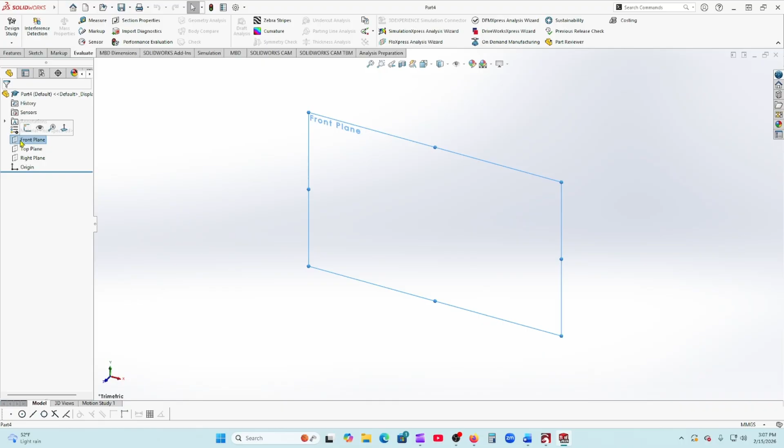I'm going to start by opening a sketch. I'm going to make sure that I am in millimeters, grams, and seconds. And I'm going to take a look at this blueprint real quick just to see what we're doing here. I'm going to start my sketch in the front plane, so I'm going to open it up like this.

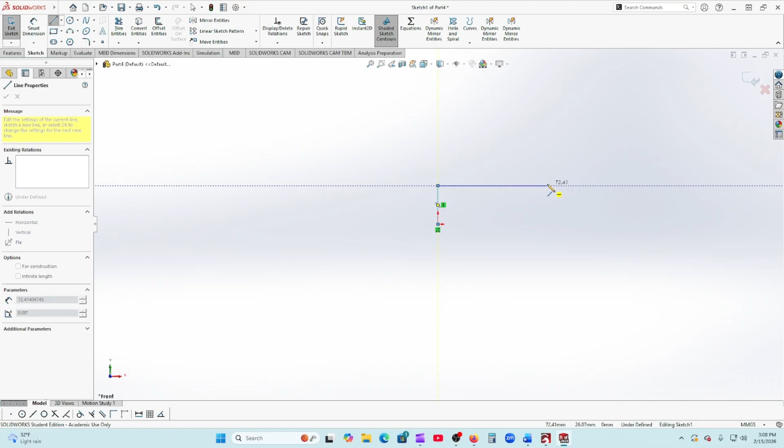Then I'm going to start with my line tool, and from here I'm going to click on the origin. I'm going to go up about 24 millimeters and then over 72-ish. Then I need to look at this. Let's see, so we need about 11 from here. Come over about 23, come down about 13.

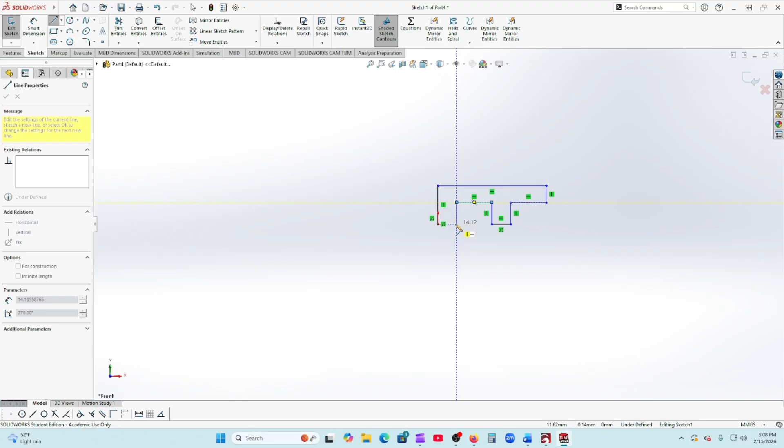About 12-ish. And I locked in a relation there that I'm going to have to get rid of because it's going to give me a hard time if I don't. Right here, exit out of my line tool, is this coincident line that I drew in here. You know what, we'll leave that alone because that looks like it's going to be pretty good for us. But I did draw in here, and I think this line has it. No? All right, well we'll see what we get here when we go to do this.

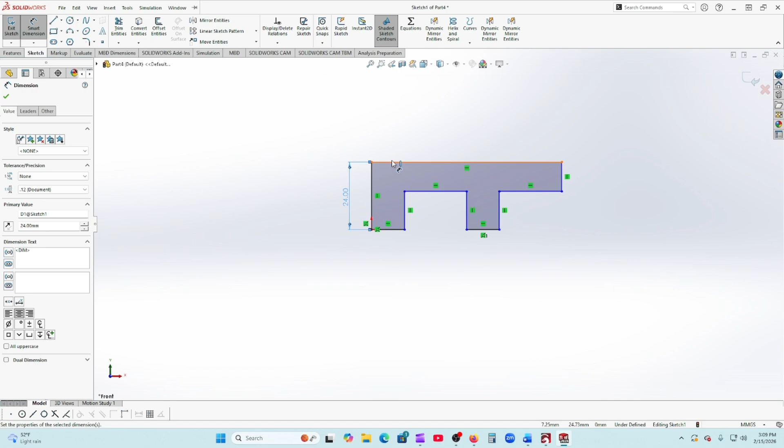So I need to dimension everything, and I'm going to dimension that to 24 millimeters. I'm going to dimension the overall length to 72. I'm going to dimension this to 12 millimeters. And then from here to here, I will dimension that to 37. We'll dimension this one to that one. We're going to dimension this one to 23.

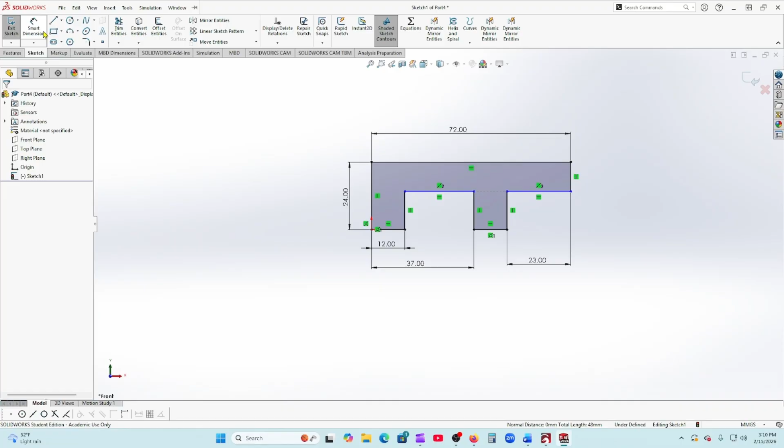The only thing keeping us from getting a fully defined sketch is this right here, so I'm going to make those collinear. Oh, I see what we're missing, I'm still missing a dimension here. So we're going to lock that in at 13 millimeters, and now we have a fully defined sketch, as you'll see down here.

So we can go ahead and extrude this. I've talked a few times about extruding and kind of looking at the blueprint to see which way is the best way to extrude this. I'm going to extrude this towards me only because there's a rib that goes on here, and when I go to draw that rib in there, it's going to make it a little bit easier.

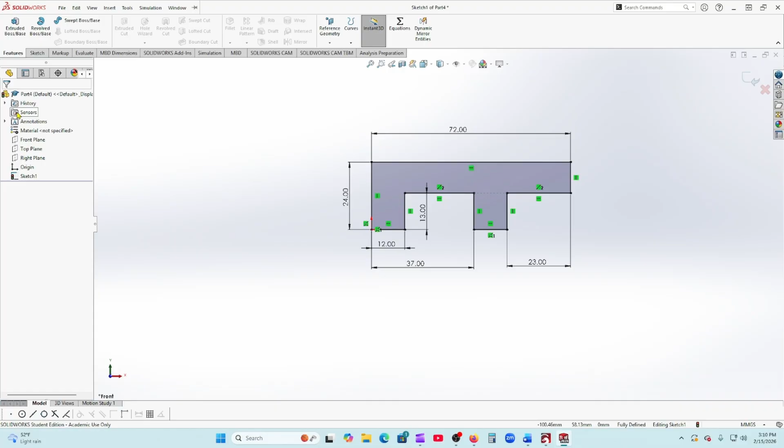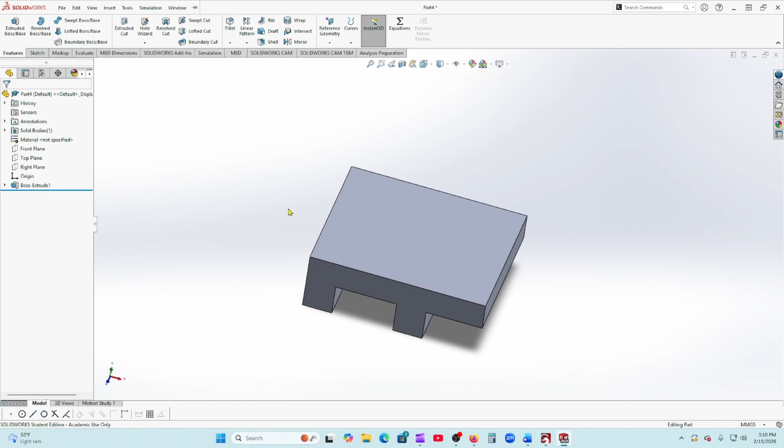So I'm going to go ahead and do my extrude boss base, and I'm going to extrude it to me blind at 60 millimeters, just like so, and I'm going to leave that at that. So now that we have our first part of our drawing, I am now going to open up a sketch on the top plane. I'll leave that right there like so.

Then what I'm going to do is I'm going to take this line and I'm going to convert that into a piece of geometry. Then I'm going to do a perimeter circle here, and I'm just going to kind of draw this out like so, and like so. Then I'm going to do the same thing over here, like so. Okay, so I've got two of them.

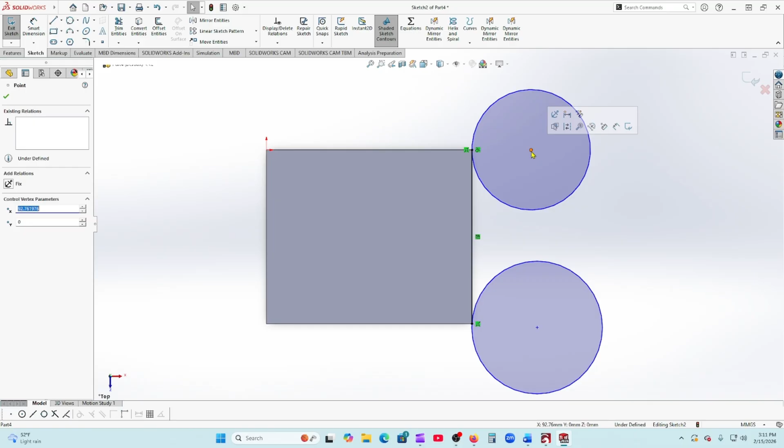Get a tangent circle, and then what I'm going to do is I'm going to make sure I lock in a relation right here. I'm going to make that horizontal, and then I'm going to do the same thing over here with this one, make that one horizontal, so it locks it in place. The distance between those should be 60, and if I do this dimension here, take a look at it like so, and you'll see that it's 60, and it's asking if I want to make this driven. I don't need it in there, I'm just verifying that it is actually there.

And then the radius of these two circles - let me get out of this real quick. I'm going to make both of these circles equal, and then I'm going to dimension this one to 36 because it has an 18 millimeter radius on it. So both of those are now locked in.

And then I need to draw in 2 more circles, and they are going to be a diameter of 18. So I've got to draw a circle here and here. Make both of these equal to each other.

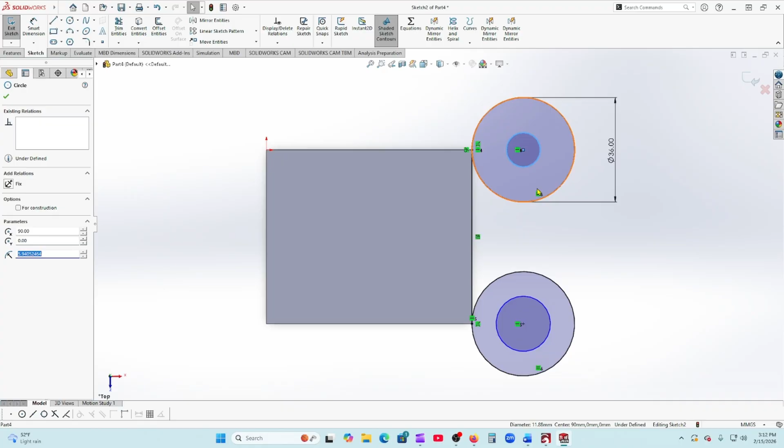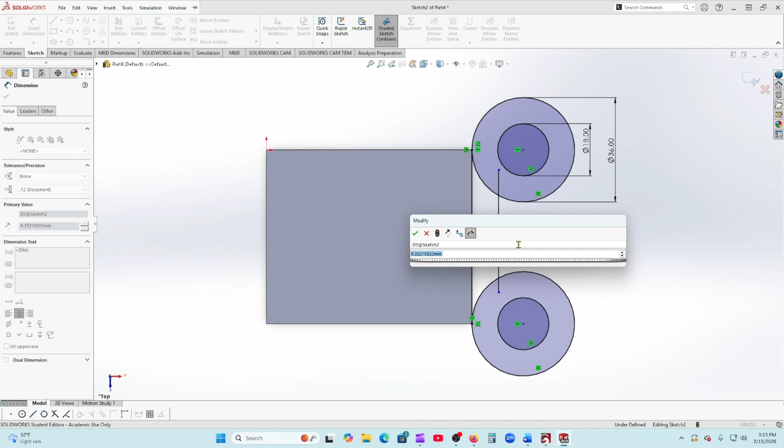So, make these 18. Like so. And then what I need is a line, so take it out of there. And then I'm going to make that 12 millimeters from here. Like so. Then I'm going to trim out everything that I don't need. Trim that out, trim this out, trim that out, trim that out, and now I have a sketch. And we're going to extrude that up.

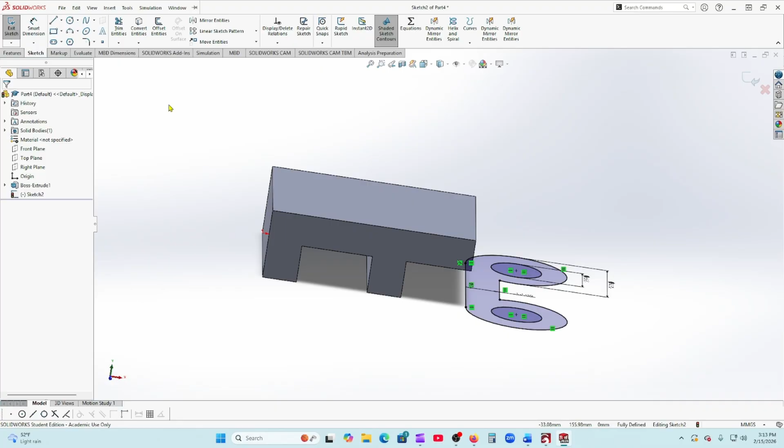If I rotate this around, you'll see that because of the way I drew that on the top plane, it drew it down here. I need to extrude that a distance of 36 millimeters, so we're going to do an extruded boss base and make that 36 millimeters like so.

And we are done. Excuse me. All right, so I'm going to go back up normal to the top because we do have another section in here that we need to do.

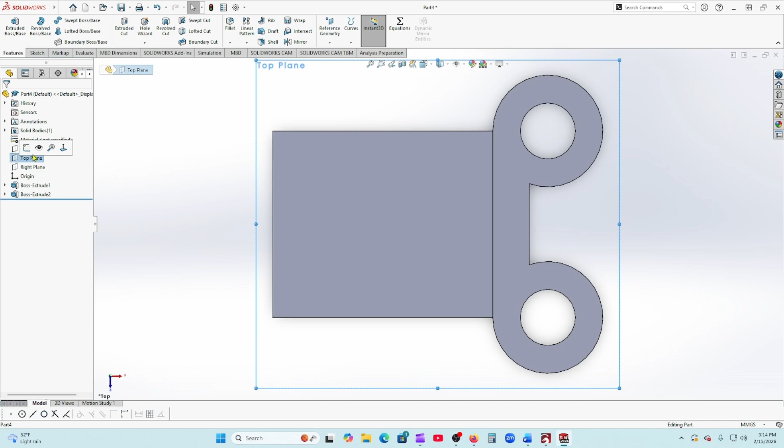So what I'm going to do here is convert that. Go back into my top and open a sketch. Then I'm going to click on this, convert it, and then I'm going to click on that and convert that. And then I'm going to convert that line. The only thing I need to do now is draw myself a line here, like so, and then I can trim everything out that I don't need, like this.

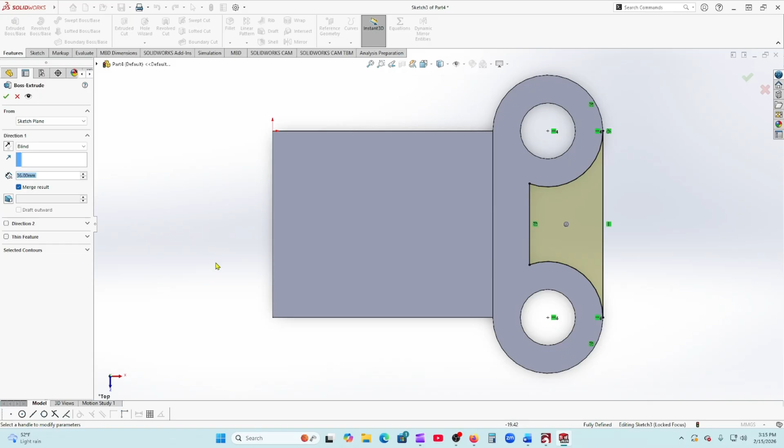Now I have a fully defined sketch again, right here, and according to our blueprint, that needs to be extruded to a depth of 12 millimeters, so let's change that real quick to 12.

That is done. And then I'm going to open a sketch on this surface because we have a slot that needs to go in there. For this one, I'm going to go to my straight slot tool, and I'm just going to kind of draw it in place right now, and then I'll dimension it here in a second.

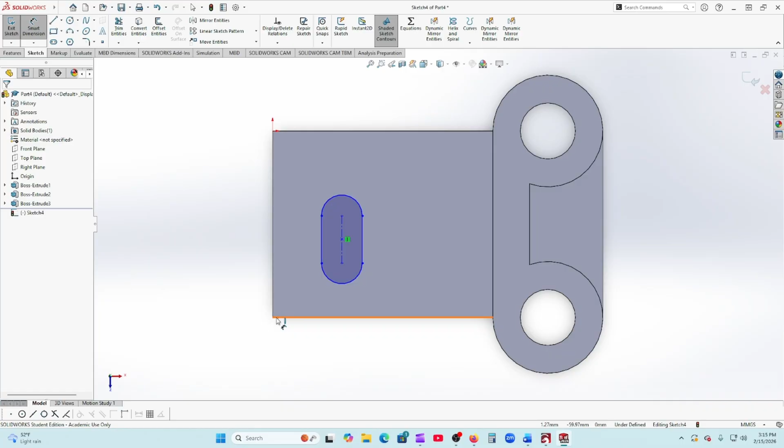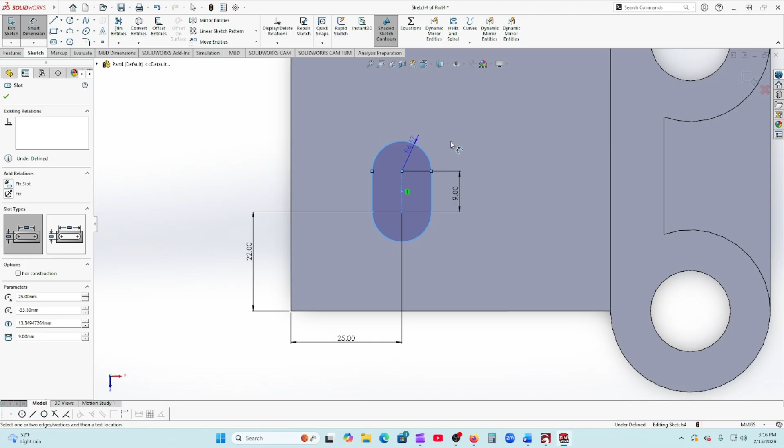All right, so right now for the bottom right here, we need to be 25 millimeters over, and we have to be 22 millimeters up. Let's try to get that there. 22 millimeters, like so. The centers for our slot here need to be 9 millimeters apart, and then the radius for that is 8 millimeters, so let's go ahead and make that 8 millimeters.

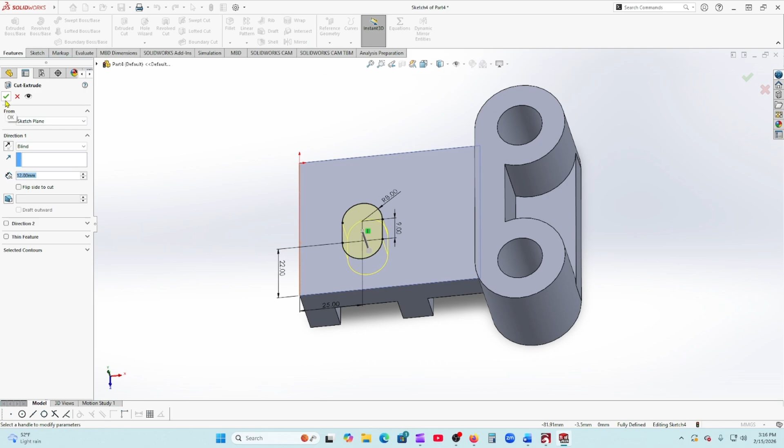Now we have a fully defined sketch right here, so everything is good. And what I'm going to do now is an extruded cut, and I'm just going to say blind on this one and hit enter. So now I have a slot in there.

Now the only thing that I have left to do is add a rib, and I'm going to go back into the front plane. I'm going to open a sketch, and what I'm going to do here is draw a line where this rib is going to go, which is right here. Right click and select to get out of there.

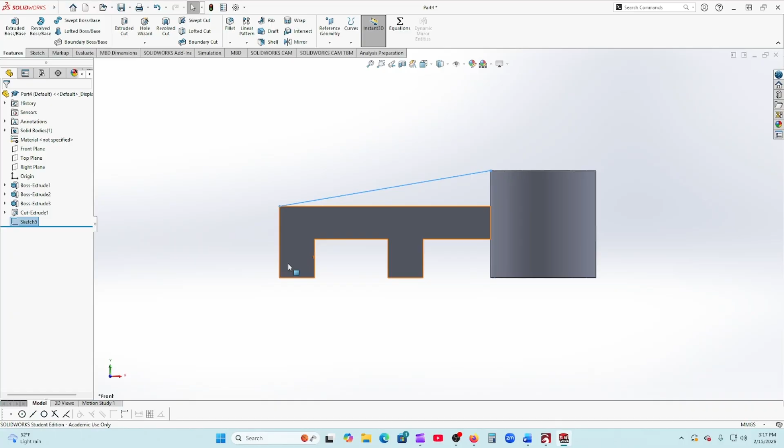Now I could draw all this in right here and then extrude it this way, but we're going to do a rib so I can demonstrate to you how to do one. So I've got a little bit of an isometric view right there right now.

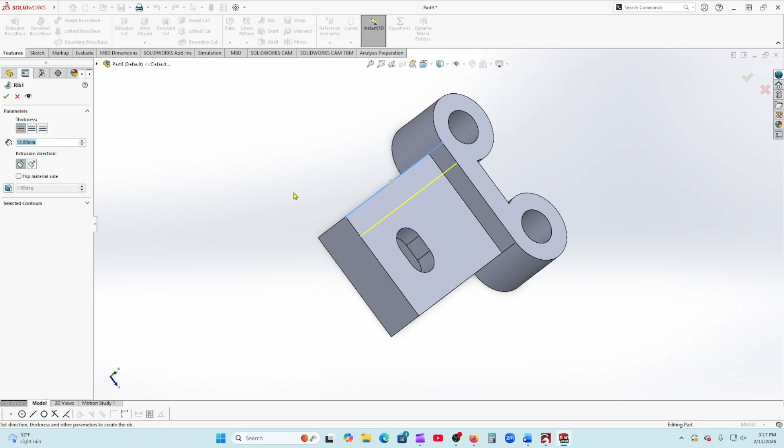So what I'm going to do is in the features tab, go over here to where it says rib, click on rib, and then look at what I got. Now, I don't want to go in two directions, which is what I have selected right now. I want to go one direction, and I want to pick the correct side that I'm going to go in. The thickness of this rib needs to be 12 millimeters, so we're going to do that, and make sure that we are extending our rib in the right direction. It looks good, which is down.

So I'm going to go ahead and hit my green check mark. And now I have a rib. Pretty simple. Now the only thing that we have left to do is to add our material, which is AISI 304.

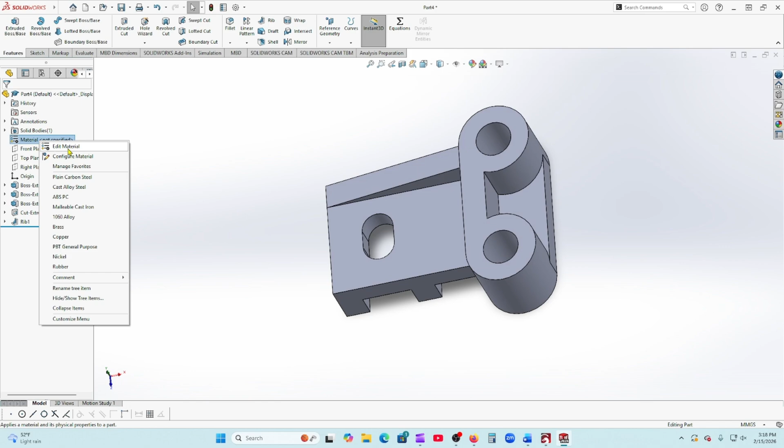So I'm going to right click on material, click on edit material, which brings up my different materials. I see AISI 304, so I'll click on that, hit apply, and close this out. You'll see that it's changed the color of my part.

And then I want to go to evaluate, and I'm looking for mass properties. So we're going to click on mass properties, and I'm going to bring this over here.

And what we're looking for right here is the mass. According to our book here, we are supposed to be at 1174.40 grams.

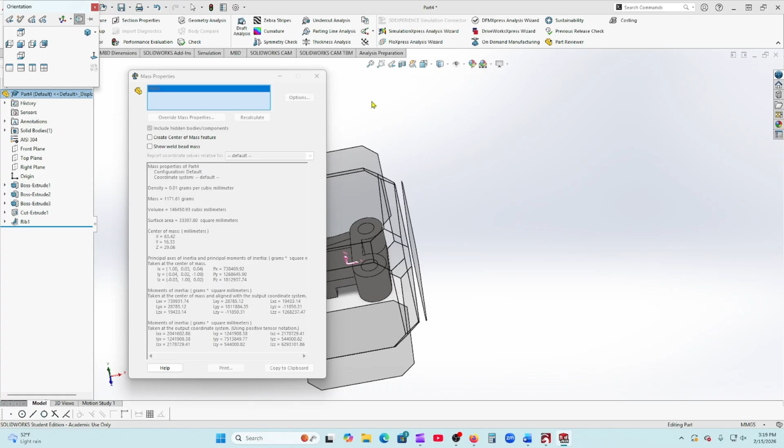And we're not. You'll see that we are a little bit low right here. Still a little bit low. So let's find out why. And I already know why, because there are supposed to be 2 fillets in here that I did not put in, and that will change the weight here in a minute.

So let's go ahead and add that. There are 2 radiuses of 5 millimeters that we have to put in here. So I'm going to go back to my features tab, go to fillet, and put in 5 millimeters right here, and then select where I want those 2 fillets to go.

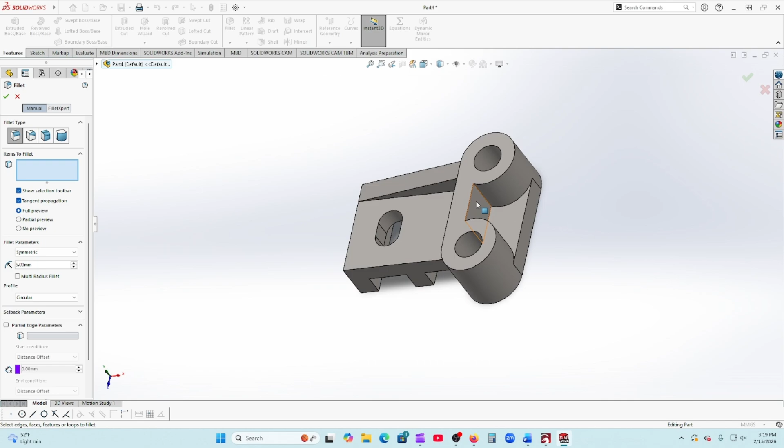I'm just going to rotate that down like so, rotate that down in there, and hit my green check mark. Now I have 2 fillets. My part is complete.

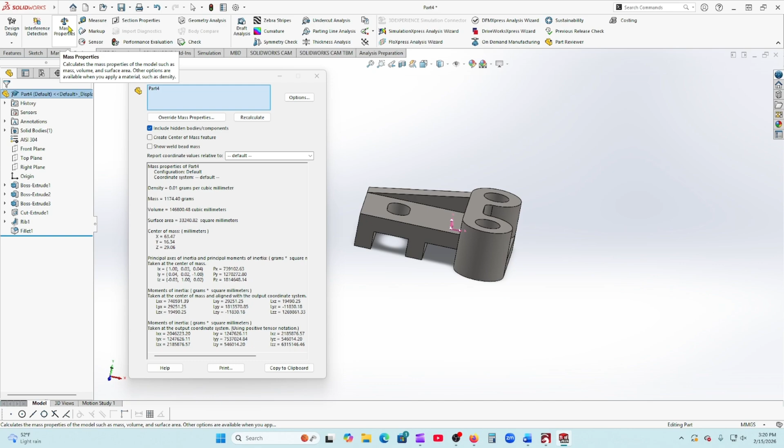And let's go back over to evaluate and go to mass properties. And now we are at 1174.40. That's what the book tells us that we should be at. So we have done right by the drawing. All right, so that's a good start right there.

Now, when you're doing the CSWA test, that's one of the things that you need to look for. Your numbers should match exactly one of the 4 options they give you on the very first sketch. That's kind of your tracking point on there.

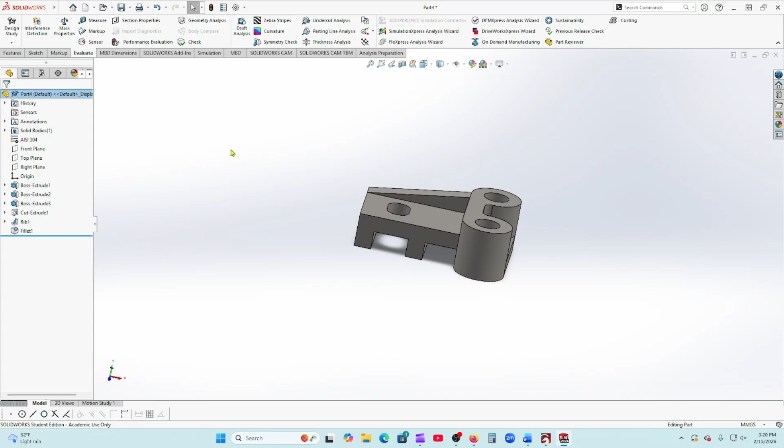So what I'm going to do right now is just put this normal 2, and we don't have to blueprint in the CSWA, but for the class, I'm going to take you into blueprinting. So what I'm going to do is save this.

I'm going to save this as YouTube, if I can spell. I'm going to put that as YouTube video, and save that.

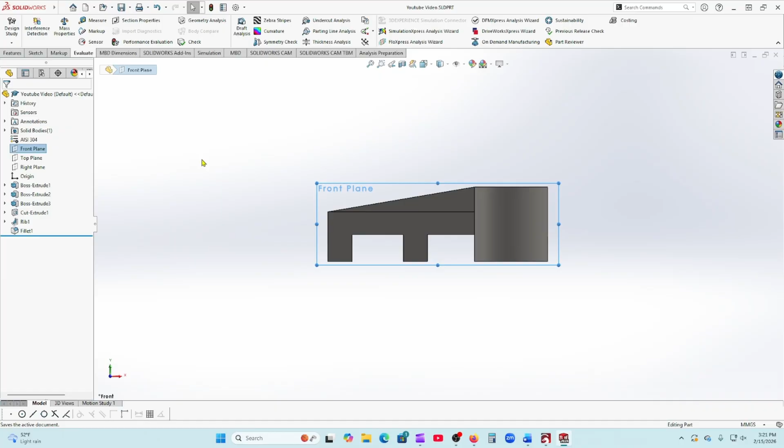And then I'm going to come up here and open a new document, and I am going to open a drawing. I'll click OK, and leave my part open while I do this. So I want to do this in landscape, so I have that selected, and I want to display all, display sheet format. So I'll hit OK, and then I have my part right here.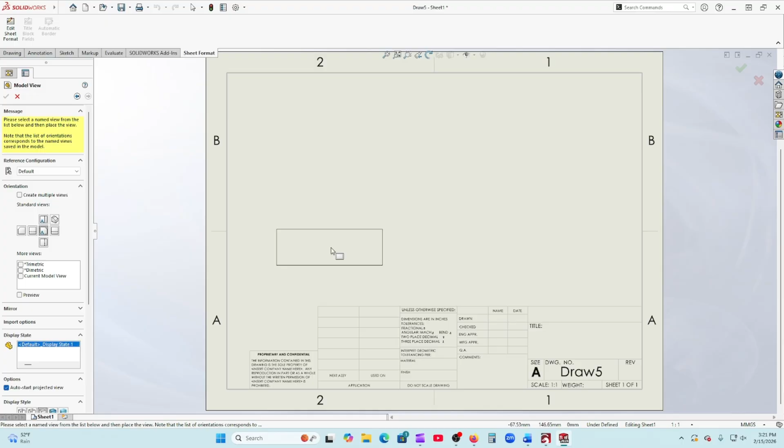So I'm going to double click on that, and then drag my first view over here like so. I'll drop one here, one over here, and then we'll do an isometric view like so. And then hit my green check mark, and then my isometric view, I can pretty much drag wherever I want.

But these others are locked into place. Now I can bring this closer to my front view, but I can't move it left or right because it's locked in here. And then I have the same thing here. I can move this left or right, but I can't move it up and down. So if you remember our projection planes from our blueprint class last semester, that's where that comes in at.

Then what I'm going to do is click on this drawing, and right here it shows visible or hidden lines in here. I'm going to turn those on, but I don't want them on for everything, so I'm going to turn them off on this sketch right here.

Oops, not that. I want it like that. And I'm going to turn it off on this one as well. And then we're just going to leave our hidden lines visible on these two sketches.

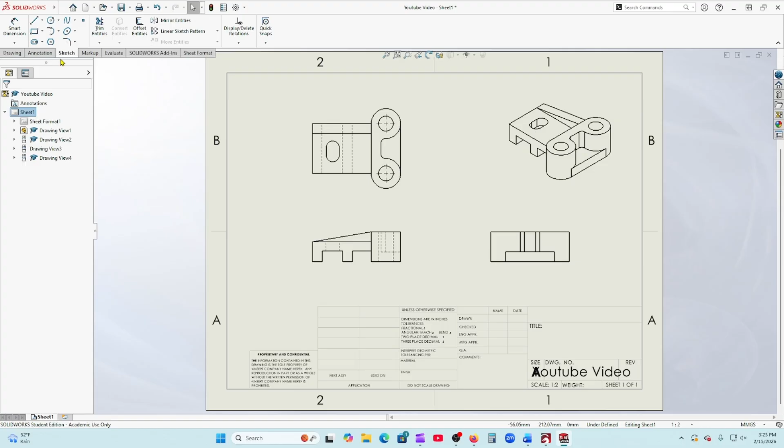Now all we have to do is go through and start dimensioning everything. So here we'll go into sketch, go into smart dimension, and zoom in here. This right here needs to be 24. So I've got that in there, and I don't want any decimal places after the number.

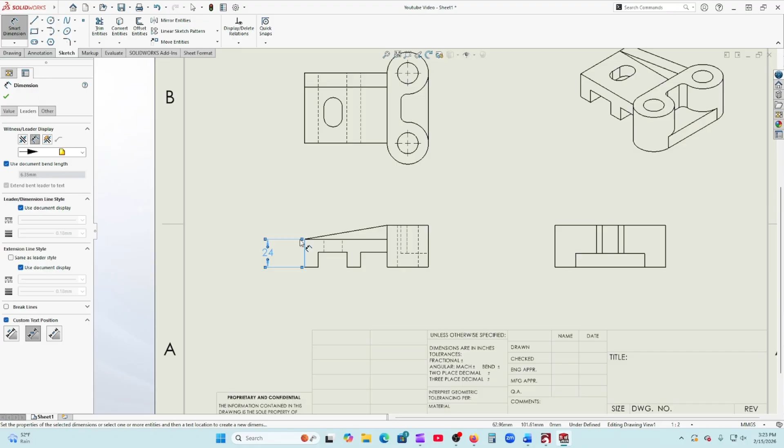Then I'm going to go to leaders, and custom text position, and turn that to where the number is facing up, like so. And if I want my arrows here inside, I can click on that, and it will put them inside, and I like that view a little better. We'll do that just like that, and do the same thing with this one, making all our changes here.

Now we want to keep those outside. We'll do a custom text position, and fix this here, make that look good.

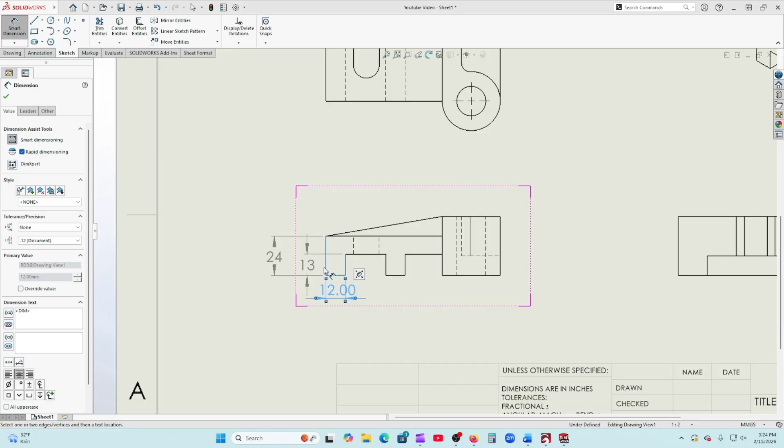Now all we're going to do is go through and do the rest of our dimensions. I'm going to go ahead and put down everything that we need, and then I'll go back and fix them as needed.

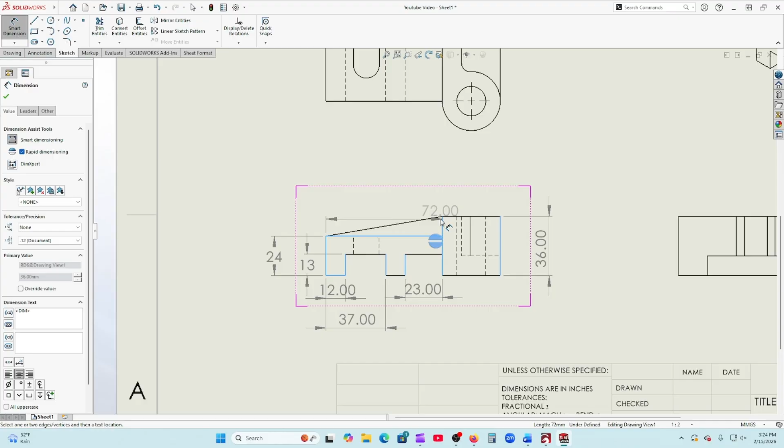So leave that right about there, and we need one right here. Then I need one from here to here, right there.

Dimension here. I'm just dimensioning this like we see in the blueprint from the book, which I didn't give you guys a blueprint, so just put these in like that. Well, I gave you a blueprint, but I didn't give you the book, so you don't see that.

Oops, we got to get rid of that one because we don't want that at an angle. So I'm going to go ahead and delete that one and redo that real quick.

Oh, what are you doing? Why do you keep doing that to me? It's always an interesting day when stuff happens. There we go, all right, we're good to go.

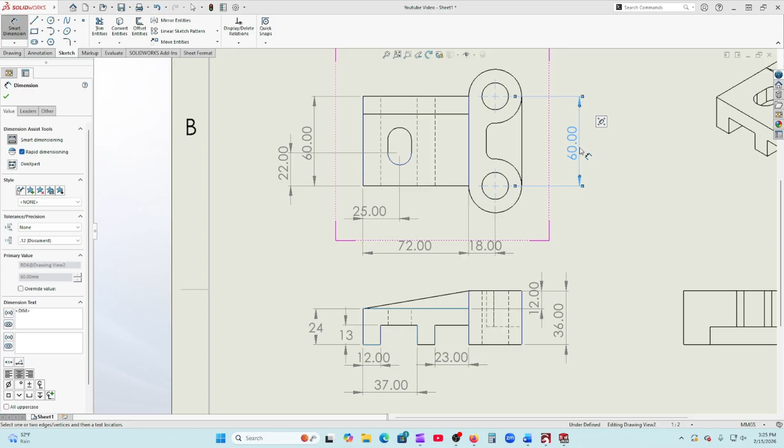Now I need to do one here. And then they have a dimension here. And then they have a dimension here. Here. Here. There.

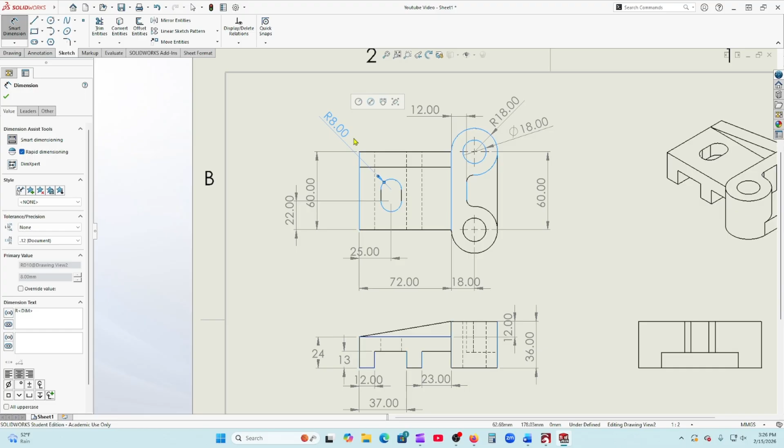Dimension here. That should... nope, nope. And I need one from here to here. And one here.

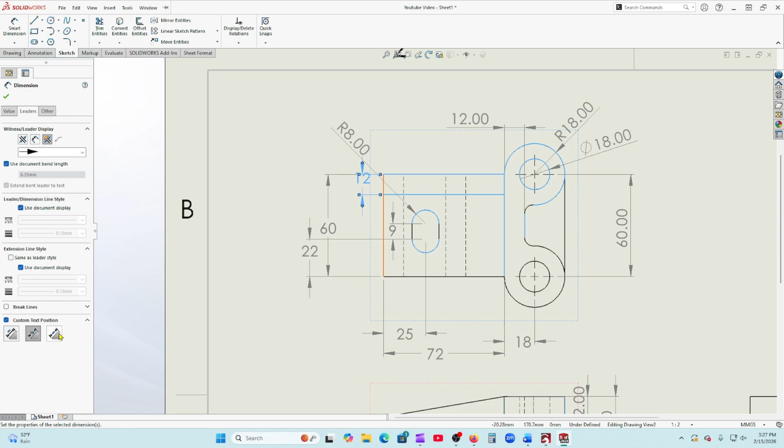Custom text, that. And then here I'm going to go with this radius, and then I'm going to go with this one where I get the little bent line right there, and then no decimal places. Here, same thing, change that up.

Right here, break line. Decimal places. Almost done, we're on a roll.

There, change that like so. And then the last one that we have to do is this one. Do that right there, turn that around. And no decimal places. Now we can kind of just move everything around the way we want it, just getting a good look for everything.

We need to make some changes to this because in the blueprint it calls out for 2 of these here. So what I'm going to do is click right here where it says dimension text, and I'm going to type in 2, capital X with a space. You'll see that it changes everything in there when we do that. I'll hit OK, and there is one more dimension that I need to put in here, which is this one, and I'm going to put that one right here.

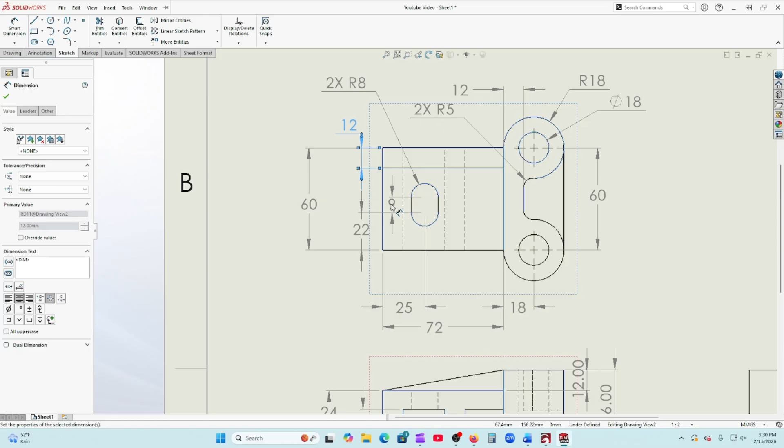And that looks pretty good. I kind of like that. Let's go down here, let's change all of these. We still got to do our right side view, but for right now we're doing pretty good. I'm just going to go through here and get everything done the way I like it, and we'll organize everything.

It's about making it look the way you want it. Here. There. And there. More right here. Upside down, kind of like the way that looks right there. That's good right there, that's good. Right about there. Anything else?

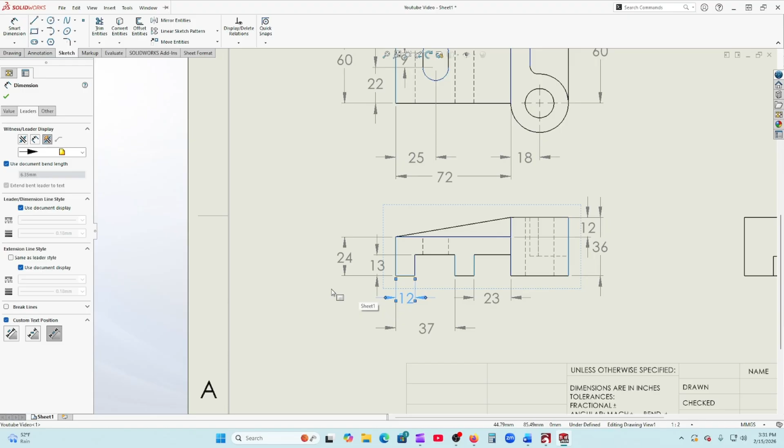Looks pretty good, what do you think? I like that, we got everything in there that we need. So the last thing that we need to do is dimension this here.

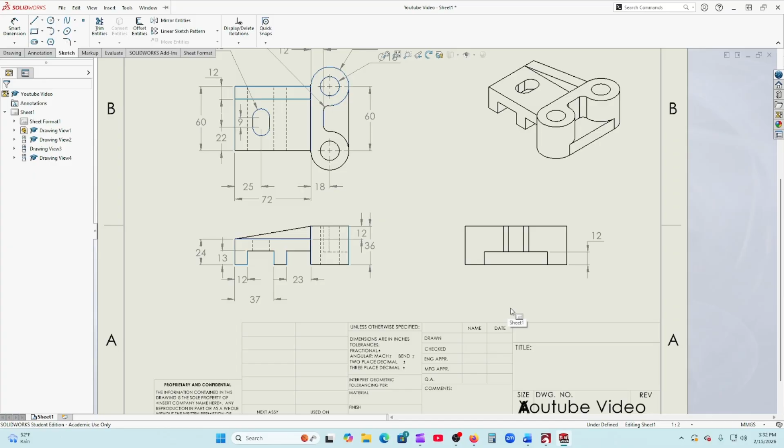And we have to put in the length of this, the height of this ledge right here. Again, we don't want any decimal places. And we're going to do our custom text like so. I kind of like the way that looks. Everything looks good right there. Got everything called out.

All right, so the last thing that we need to do is we just need to change our sheet format in here, change some stuff in here. So we're going to click on sheet format and then edit sheet format. And I'm just going to click inside of this here, and it's going to open that up.

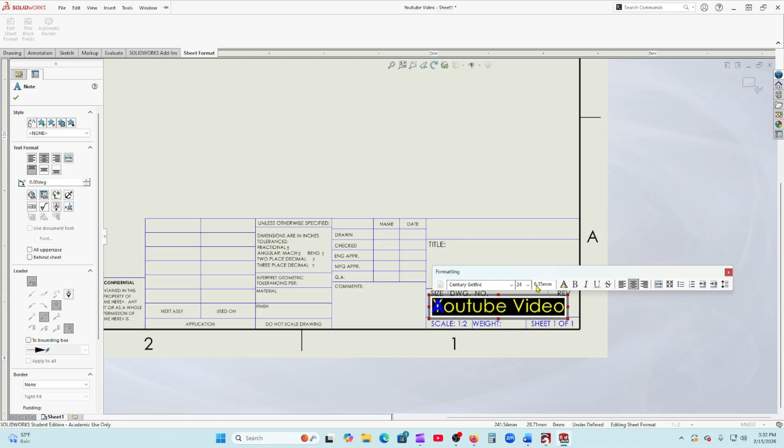I'm going to change that to 12 millimeters. I'll leave it as Century Gothic bold. The only thing that we need to do here is just kind of... oops.

Let's get this where we want it, that one right there. And then for here, I'm going to put in here, because we're doing this off of a CADArtifex template, I'm going to go ahead and change this to Century Gothic like everything else. And you know what, we'll leave it that size. And click back in here.

Get in there. There we go, and we'll do CADArtifex. CADArtifex like so. And I want to make this all bold, so we're going to click on that, make that bold.

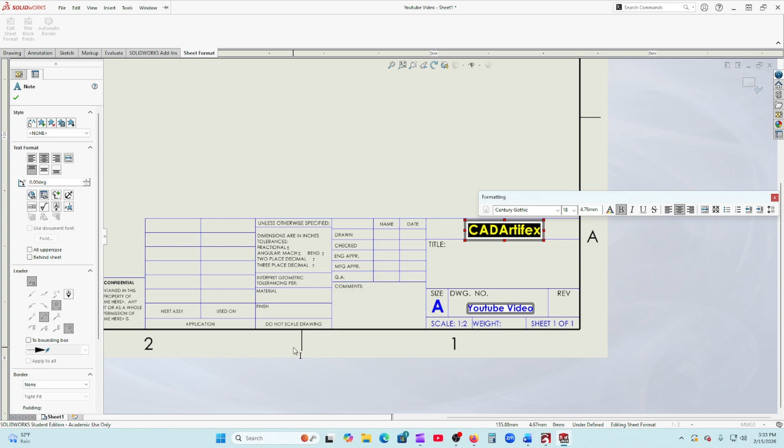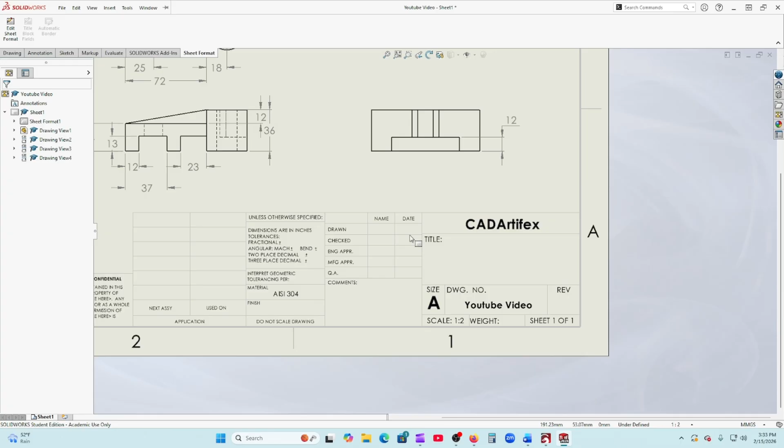Click out of there. Last one we're going to do is our material, and we are AISI 304. So click out of there, and that's all we're going to do for changes to this. So we can exit out, we have everything in our blueprint that we want.

Looks pretty good, we don't need to make any other changes, so now we can go ahead and save it. Saving it as a drawing, I'm going to keep it the same name as my part. I'll hit save, and then I'm going to save it again. Save as, and I also want to save it as a PDF file so I can print it easier. And I'll click OK there, and then I'll save it one more time.

This is just me, I like to have a picture of it. Like so, and we'll put that right there. And we should be good with everything. We don't have anything else that needs to be changed.